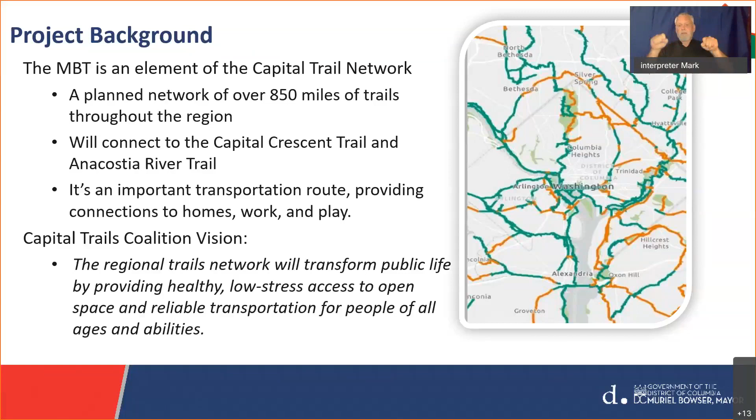For a little bit more specific background on the Metropolitan Branch Trail, if you're not familiar with it, the Met Branch Trail follows the old Metropolitan Branch of the B&O Railroad. And the idea for turning this into a trail goes back to the 1990s.

In the District and in sections of Maryland, it's been built in sections over the past 20 or so years. Here we see some of the milestones of development of the trail, when some of the first sections were built back in the late 90s and early 2000s.

This section that we're focusing on tonight is from Fort Totten to Takoma, and the rest of the presentation will focus more closely on that. We finished the environmental planning for this section in 2010, 2011.

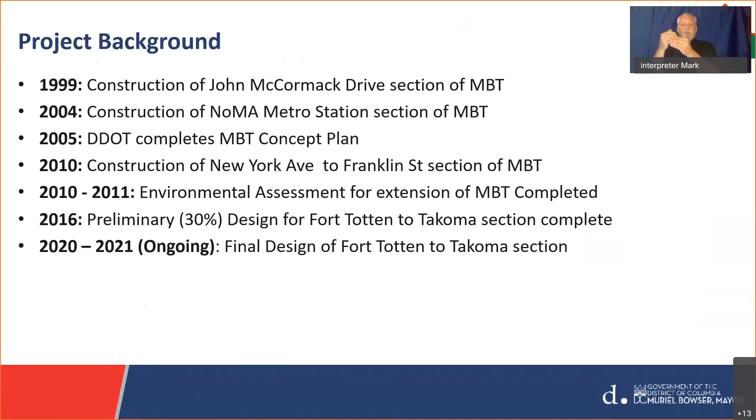We completed preliminary designs for this section in 2015 and 2016, and now we're approaching the final design and moving toward construction. You can move on to the next slide.

As Samer mentioned, this is only one section of the Metropolitan Branch Trail that we're going to focus on tonight, the Fort Totten to Takoma section. We did want to give an update on some of the other sections of the Metropolitan Branch Trail under development.

There are many of them, so we'll give brief updates, but if you have questions on these, you can follow up directly with me after the meeting, and we can connect you with some of our other staff.

For the other sections of the Metropolitan Branch Trail currently in development, there's a section on 8th Street Northeast between Franklin Street and Monroe, where we have a proposal to install protected bike lanes later this year that would connect the existing sections of trail running through Eckington and Edgewood up to Franklin Street, and then picking up the section in Brookland that runs along John McCormack Drive.

Moving north from there, there's a section of trail currently under construction in Brookland to Fort Totten that connects the John McCormack Drive section of the trail with the Fort Totten Metro Station. That project is currently under construction and is anticipated to be completed later this year. There's a specific project website for construction updates: metbranchtrail-forttotten.com.

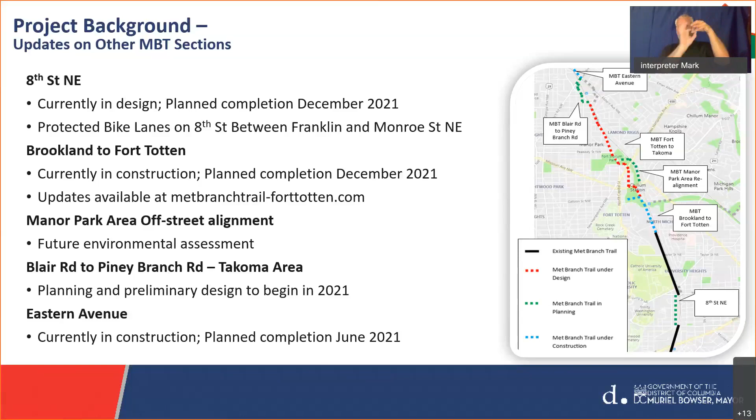And lastly, along Eastern Avenue between Piney Branch Road and the DC Maryland line in the city of Takoma Park, there's a short one-block section of trail that we're breaking ground on very soon, any day now. We're taking advantage of recently completed PEPCO work to move that project into construction, and we expect to complete it in June 2021.

So again, if you have any questions on the other sections of the trail, feel free to contact me. But for the rest of the presentation, we'll focus on the Fort Totten to Takoma section, and I'll turn it back over to Samer.

Thank you, Michael, for the detailed information. So now we're moving to the project overview, which is the section Michael mentioned, Fort Totten to Takoma, and that's what the presentation will be about.

The current project focuses on the mid-trail section from Fort Totten to the Takoma neighborhood. This section of the trail will be both on-street and off-street. Where shown in green, that's off-street; the red line shows the on-street segment, and the rest of the trail will be off-street along Blair Road.

The preliminary 30% design for this section was completed in 2016, and on this project we're taking it from 30% design all the way to 100% design. We are currently at 60% design, and the plans will be uploaded to the project group site after this presentation, as we mentioned earlier.

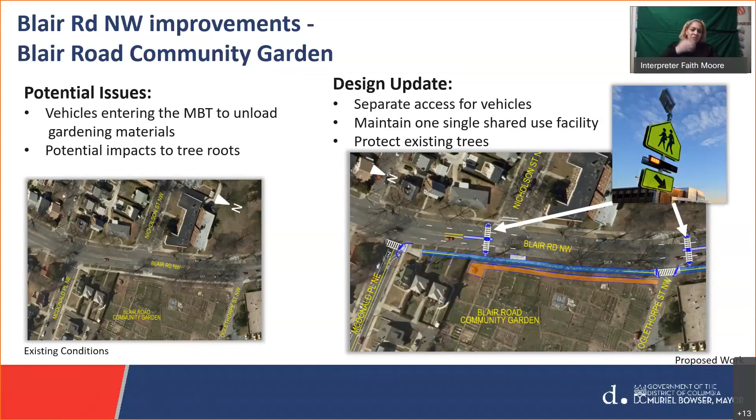Here's a before and after of what we expect things to look like. This is standing at Oglethorpe looking southward. You can see the proposed entrance to the garden on the left, and the new trail on the right. We're looking at protective measures for the mature willow oaks along Blair Road, and since there's a drop off here, we're considering railing along the path to protect trail users.

Okay, let's go to the intersection of Blair Road, Kansas Avenue, North Dakota, and Peabody. This is one of those intersections in the district that we all love, right? There's a lot of legs, everything kind of comes together. It's easily the most complicated intersection in the project.

In the existing condition, all legs have marked controlled crosswalks, so we already have good pedestrian accessibility to the trail. The MBT will be aligned on the east side of the road, which is something new to the design. We've been focusing hard on how to eliminate permissive left turns across the trail without jamming up traffic at this intersection.

What we're proposing is to signalize left turns from Blair Road to Kansas Avenue via Peabody Street. This is a change from existing conditions, because Peabody Street is currently one-way westbound, so drivers have to make their left turn from Blair Road onto Kansas currently. So what we're proposing is to make Peabody two-way and provide a continuous exclusive movement from Blair to Peabody to Kansas.

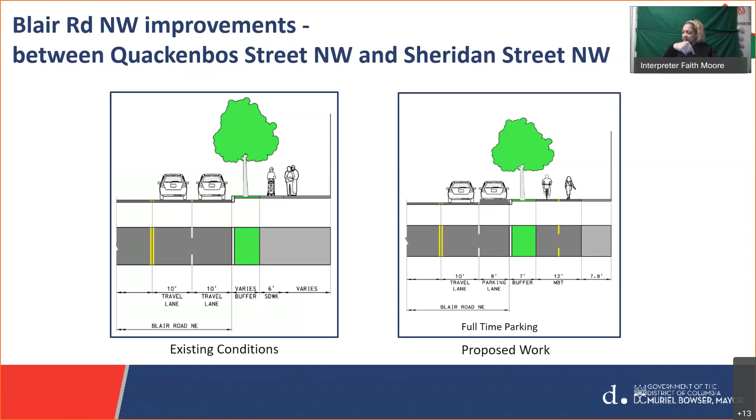Moving further north, at the intersection of Quackenbos, we're proposing high visibility crosswalks. No rapid flashing beacons are proposed north of Kansas Avenue, as the road will only be 2 lanes instead of 4, so traffic volumes are lower and the posted speed is 25. According to Federal Highway and DDOT guidelines, rapid flashing beacons are not warranted in these situations.

I also want to point out that in the existing condition, there is some frontage parking within DDOT right of way in front of the liquor store here, and that does come into conflict with the trail. So what we're proposing is to eliminate the frontage parking, but compensate for that by adding on-street parking along northbound Blair Road.

Continuing north to Blair Road at Rittenhouse Street, we're again proposing the high visibility crosswalk treatment. We're trying to get people to the trail safely, so implementing these types of measures we think will help. These are uncontrolled crosswalks, so we want to do as much as we can to enhance safety at these locations.

We also have existing curb extensions on the west side of the street, but we'll be proposing new curb extensions on the east side as well to help with traffic calming and to reduce that crossing distance as much as possible.

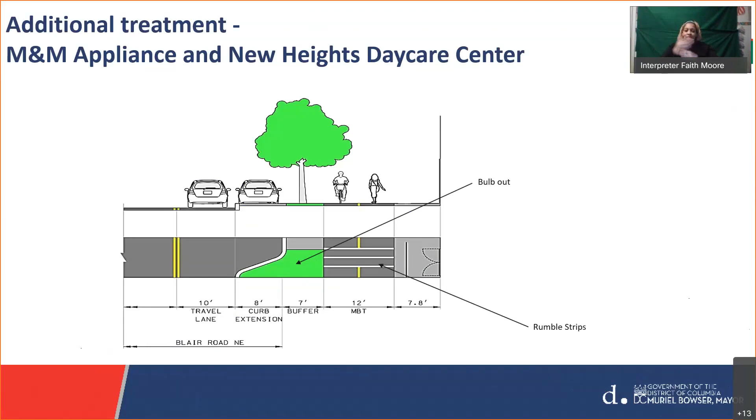Continuing north, the nature of the trail changes here. We open up, and we have one more property—a WMATA maintenance facility—with two driveways. The south driveway is currently in use and that will continue to be the case.

There's another driveway curb cut to the north, which is not in use, and WMATA and DDOT have agreed that this curb cut will be closed.

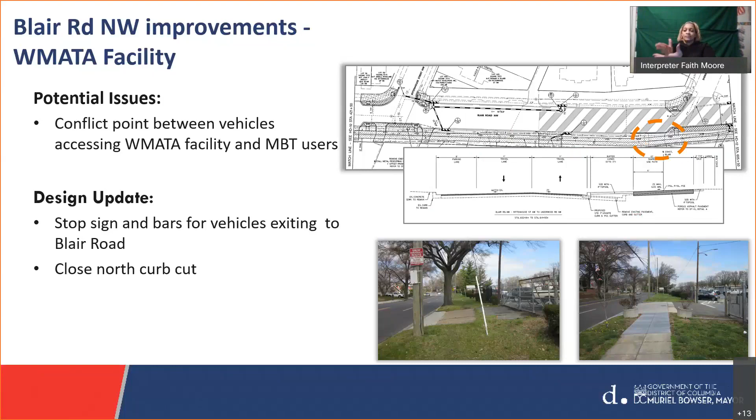Moving north to the segment between Underwood and Aspen Street, there are two northbound travel lanes. The outside travel lane will be converted to the shared use path.

The existing retaining wall is owned by WMATA, and the footing extends below Blair Road, so WMATA does have an easement in the area. We are coordinating with them on those items, but we don't propose to impact that wall or the footing below. We'll be just constructing the trail above that.

The barrier will terminate intermittently as it approaches intersections where there are crosswalks - at Van Buren, at Aspen, and then also there will be a crossing at Whittier.

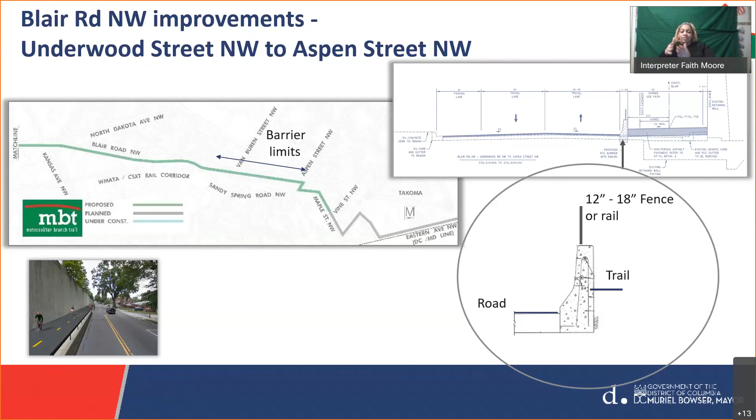Currently 3rd Street is a two-way street, and we will be proposing to make it a one-way southbound street. Vehicles intending to head northbound on Blair will take a right onto Whittier and then take a left onto Blair. We are also proposing back-in angled parking, which results in a net increase in this area of 3 parking spaces.

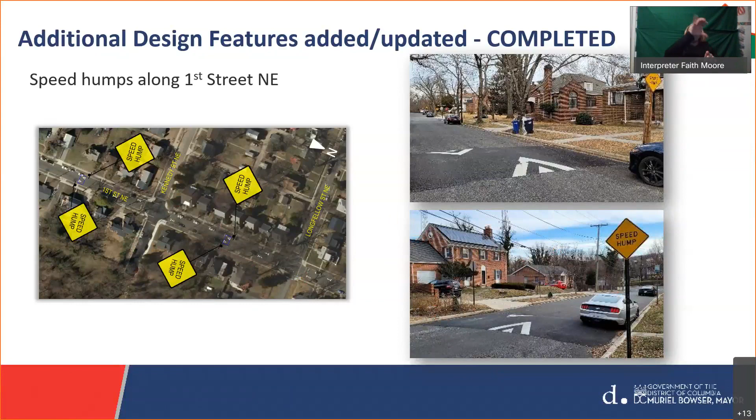Thank you, Steve, for the detailed explanation of the Met Branch Trail design. That's very helpful. Thank you very much. So now let's go back to the schedule for the project, since we have all the fun stuff we're going to do along Met Branch Trail.

I'll go over the schedule. We started final design in January 2020, submitted the 30% design in May 2020, and now we're submitting the 65% design, which will be uploaded to the Met Branch Trail website. Our goal is to finish the 100% design in spring 2021. Based on that, we're looking to start construction in winter 2022 and finish in fall 2023, giving about 2 years of construction to complete the project.

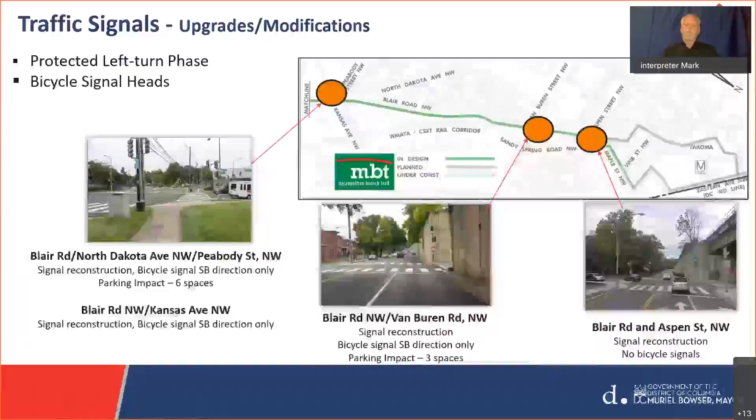What we were really focusing on tonight was the signal at First and Riggs, and the new signal at New Hampshire. There's a small segment of the project at Riggs and along First Place Northeast that we didn't cover in detail — those areas were designed at 30% and haven't changed much. We wanted to focus tonight on areas of the project that have been updated. These are still part of the project and will connect with the project currently under construction to the north and south.

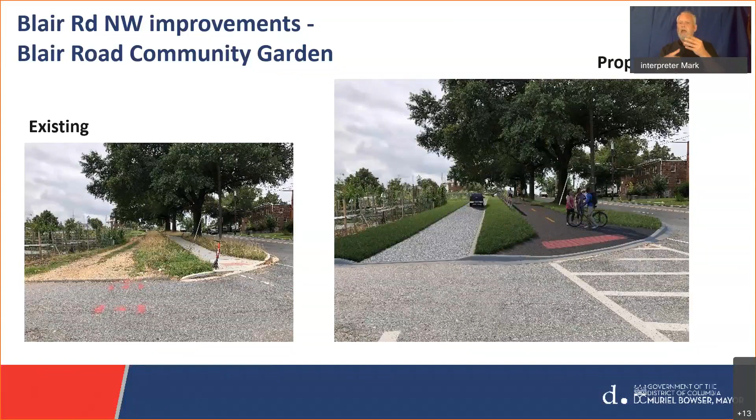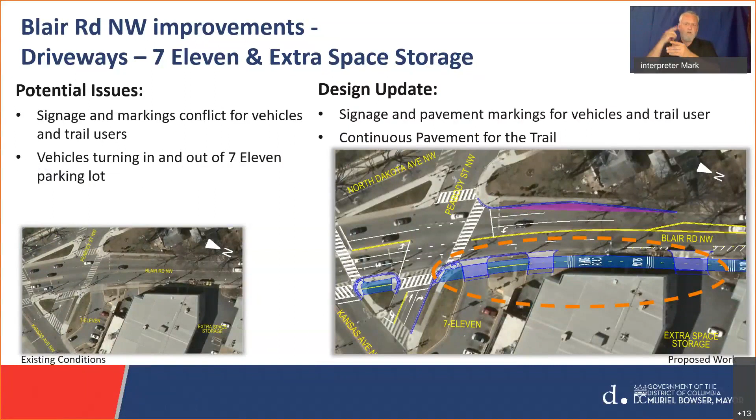For the next question: can we reduce the number of curb cuts at 7-Eleven and the extra space storage? We evaluate the locations, but those curb cuts have been used, so DDOT cannot close any curb cut already in use. So it's not that we're not in favor of closing them, but we can't because it's been used by all these businesses, and if we close them it will impact those businesses. We're building the trail here to serve the community and the businesses, and we cannot close any curb cut that serves or will impact any business along the trail.

Next question: what thought has been given to routing the trail across NPS land between First Street Northeast and the track? I apologize if we already covered this, it took me longer to join the meeting than anticipated. I think, Michael, you answered that question earlier. Yes, bringing it back to the section of trail between First Street Northeast and the railroad tracks on NPS property that we talked about earlier.

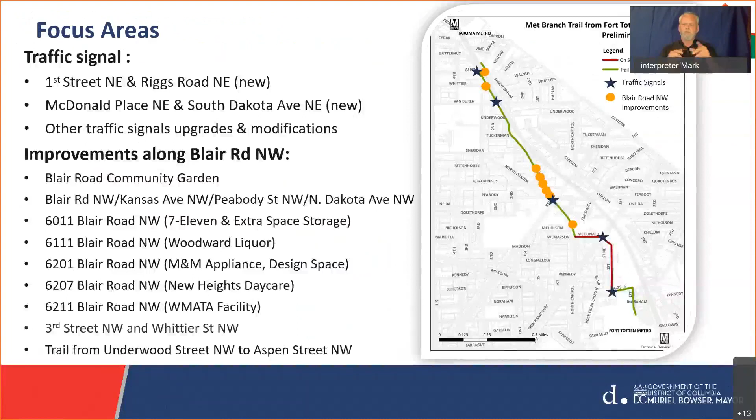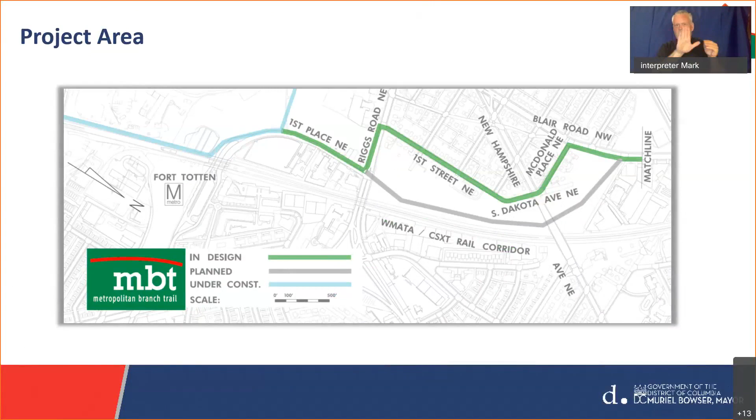Okay, could we propose to add a CaBi station and/or bike parking at Third - sorry, I just scrolled down - at Third Street, instead of adding three parking spaces? We could take that into consideration, but we'll think about that when we go back, and take it as a comment rather than respond to this question right now. It's something we could consider. Thank you for your question.

When you get to Aspen, is the trail elevated off the street or is it at street level? Do you have a rendering or the space usage for the Aspen underpass?

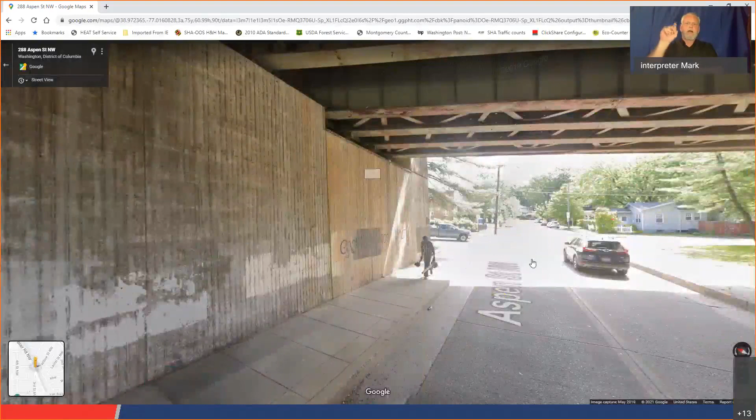This picture shows the trail will be under the bridge, so the trail extends under the bridge, and we'll provide more visual pictures. If you need more detail, please email us your concern and we could provide more detail for this section, showing how the trail will run along Aspen. Maybe Steve, you can talk about this a little bit. You can get a visual here from the Google Street View.

It'll be above the curb, but at that sort of sidewalk level. The 65% plans propose the trail to be at the sidewalk level here, and then this dirt space is proposed to actually be brick pavers.

DDOT team and all consulting, thanks, great job. Can we shorten the time between 100% design and start of construction? Let's move faster. Thank you.

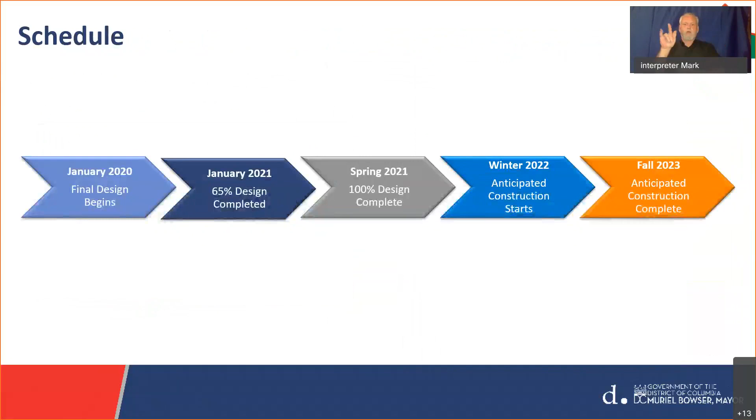Actually, we would love to, but we have to coordinate with our stakeholders, such as the utilities and water, so the next phase of this design is more focused on this coordination, making sure we meet all agreement design and resolve any conflicts with underground or on-ground utilities. That's the next step in design. That's why we can't move to 100% unless we clear all these utilities and satisfy all the design requirements based on federal highway requirements and DDOT laws. We have to make sure we meet the requirement and law.

Next question. I would just add that we were coordinating with WMATA and CSX on that retaining wall mentioned during the presentation, and also with utility companies, DC Water and Pepco. We don't have a lot of utility pole impacts, but we do have a number of guy wires that create vertical clearance issues and horizontal conflicts between the trail and the pole. We are coordinating with Pepco on relocation of those guy wires outside of the trail envelope. These things take a little time, and we have to make sure we're clear with storm drain improvements and clear of underground utilities like telecom, underground electrical conduit, gas, water, and sanitary sewer.

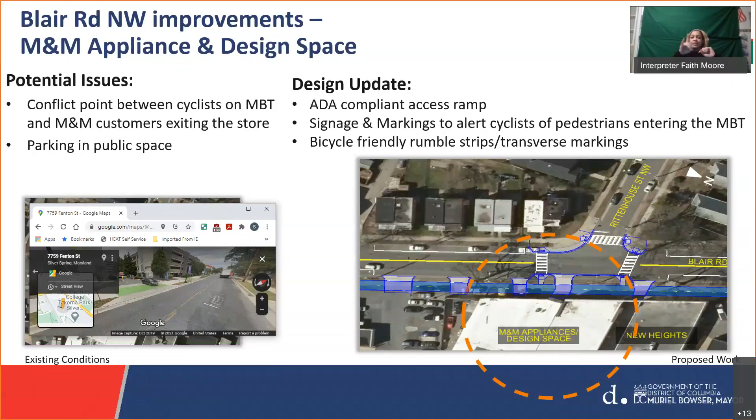I wanted to go back to the Blair Aspen intersection and ask if you are anticipating planning any signal changes there, because one of the things that makes the Aspen Blair intersection so dangerous is westbound Aspen cars trying to turn south onto Blair Road. It backs up because when there's a lot of two-way traffic, cars will back up for blocks, and then they're parked in the intersection. One of the things my constituents always talk about is whether there's enough room underneath the underpass for a turn lane, or just a left turn signal for those cars trying to get onto Blair South.

I also know the Aspen Blair intersection was one of the priority intersections in the livability study, so I wonder if that's being included here as well. I think for the livability study it was focused more on connecting bicycles and pedestrians from that intersection to Butternut. But I'll stop there—I'm really curious if you've thought about that kind of movement.

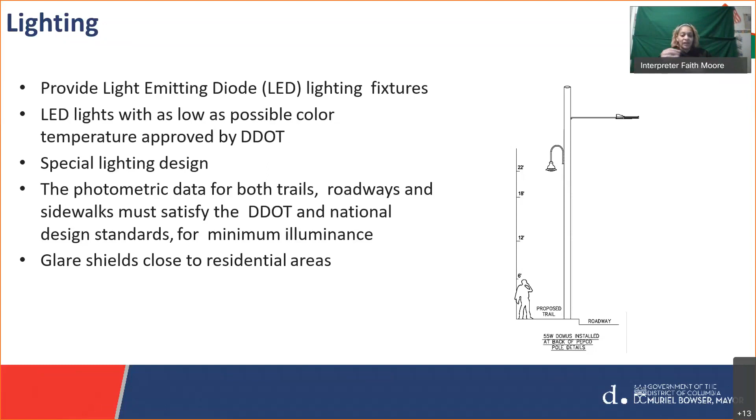Thank you. For the first question, on the interim signal and the final signal, the reason we had two phases is because based on a request from the school at the intersection of Riggs and First Street, they want the signal expedited for student safety, for crossing, and for the queuing along Riggs Road. So we expedited the signal design and construction for the students at this school. The signal will be temporary until the trail construction moves forward, and then we have to come back and redo the signal to add bike signals and upgrade it to meet the trail design.

Your second question was about Peabody and Kansas. That intersection, like you said, is very big, and I agree with you the picture may not clearly show the design. Steve, can you move to that slide showing the intersection for Peabody and Kansas?

Like Steve explained earlier, we're adding a left-hand turn movement just to relieve the queue along Blair Road. We shift the queue from Blair all the way down to the middle, so we have to make that left-hand turn to Kansas. I think Steve is going to talk more in detail about this, if you could just help me out with that.

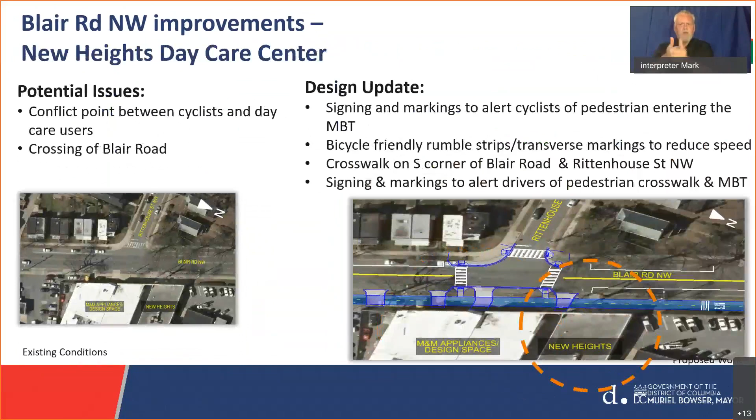Here's the question. I saw on the drawings that the plan is to take the MBT underneath, now, Aspen over to Sandy Spring. And this is new to me. I've been following this for a long time, I've never seen this as part of the plans, because unless this is not going to be where the trail eventually connects up with Takoma Park. My question is, what is the plan for when the trail goes underneath the tracks and connects up with Sandy Spring? Where is it going to go from there?

So the trail will be going—the trail will be using the community as well. It will be like a connection between Fort Totten and Takoma Metro Station. So the trail will continue up to Takoma Metro Station, so it's more like A to B points as well. It will be like a trail for the community and a commute between the two metro stations, which is Fort Totten to Takoma.

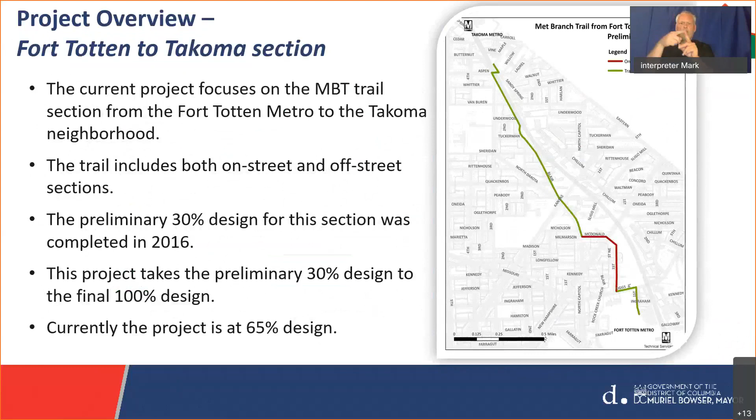Yeah, and I can respond to that as well. If you look at this map—it's a little small—if you were to zoom in on the Takoma area, going back to the concept plan for the Met Branch Trail in the early 2000s, there was a lot of debate about how the trail would get through the Takoma area, downtown Takoma Metro Station. There were two alignments, a western alignment and an eastern alignment. The Sandy Spring route, when the trail goes north to Aspen Street and then goes under the railroad tracks and up Sandy Spring, that was feeding into the eastern alignment. So the eastern alignment was from Sandy Spring to Maple, you see that gray line, to Carroll Street, and then to Eastern Avenue, where it connects into Maryland.

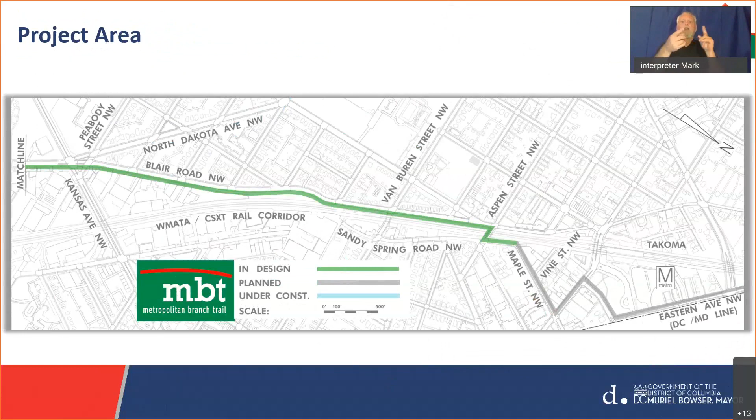And then there's a western alignment that goes up, cuts over from Blair to 4th Street, and then up through the 4th Cedar Blair intersection, and then actually behind the Cedar Crossing building and up to Spring Place, to Chestnut Street, and then down a big hill, where it ties into Piney Branch. So those two alignments are the eastern and western alignment.

So the Sandy Spring option, we've terminated it for now at the intersection of Sandy Spring and Maple. We think it still provides access for people who live on that side of the tracks to get onto the trail. And as we mentioned before, we're going to start the design on the western alignment to make that connection all the way between Blair and Aspen and Piney Branch and Eastern, where it'll link up with the rest of the existing trail.

This is Tony. Thank you for the explanation, Michael. I better understand that now. But I also think you've illustrated my point a little bit about the complexity. If you're going to run the trail eventually up 4th Street, it's a lot closer to North Dakota Avenue, and I think it would make for a much more pleasant riding environment for folks to come down 3rd, connect to North Dakota, and then come over to that busy intersection—God help you with that intersection. But thank you for the response.

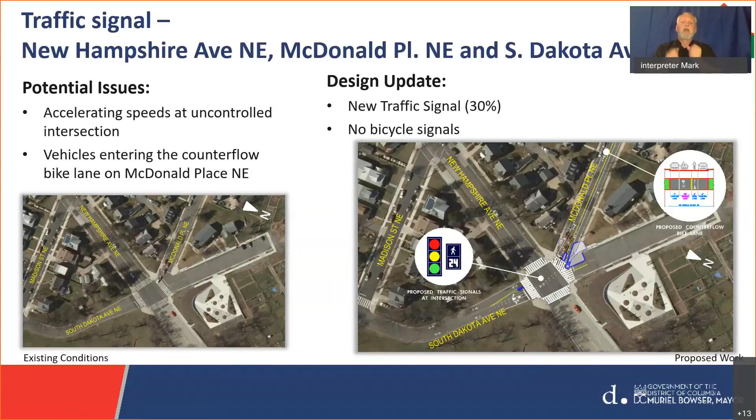Sure, we understand there are a lot of things happening in that area, and so we are coordinating with the different parties, such as PEPCO, that are doing work in that area, to make sure we are cautious regarding construction and how much construction the neighborhood sees. I shared with you, Commissioner Brooks, that unfortunately we do have to do this construction in order to provide this trail for the many users that are going to use it, and to provide a safer street for all residents and users of the road.

We do thank you for your comments regarding the streets you classified as narrow, as well as the parking restrictions. We take those comments into account, and we'll make sure to look into those concerns if we haven't done so yet, and follow up with you via phone or email.

Yeah, that's fine. Before you were at DDOT, Ms. Molina, we had this conversation in several community meetings, and basically we were told we should just be happy that you're not going to take away any of our parking spaces. There was the inference that if we didn't get along and accept what was coming down the pike, we would be punished through the loss of parking spaces. I want to make sure we're all clear that this is not widely supported at this end of the trail. A bike path is supported, and we are in favor of that, but not this location, and that's for a variety of reasons.

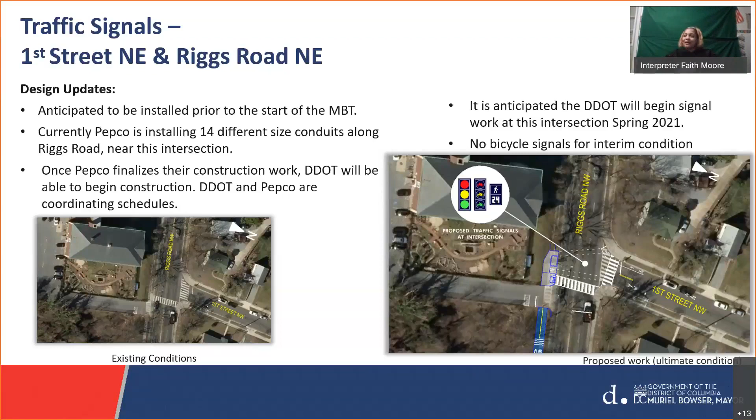But closing curb cuts, I cannot promise you at all, because we've been discussing with the right-of-way team, as well as the permitting office and access management, about closing this curb cut. Actually, it's going to be impossible to close them. So I cannot promise you we'll be able to close these curb cuts, because those businesses will say it impacts their business, so we cannot close them. We'll get pushback from businesses along Blair Road.

But modifying those curb cuts will be possible, and we already did it at the liquor store. We'll modify the size of that curb cut with the new design. And for your second question, I think Michael has a better understanding about the branding for the trail. I'll let Michael take it.

Sure. Yeah, so the Met Branch Trail has its own branding design, which is this green, red, and white package.

This includes wayfinding signage along the existing section of trail, and that will be extended to this section. This section of trail includes a couple of turns and twists, so these signs are included throughout, directing people so they know how to follow the trail, but also how to get to the trail and connect to the metro stations.

And it has a consistent pattern connecting the rest of the city, from Takoma to Fort Totten, to Brookland, down to Edgewood, Eckington, and down by Union Station. You'll see this familiar Met Branch Trail wayfinding.

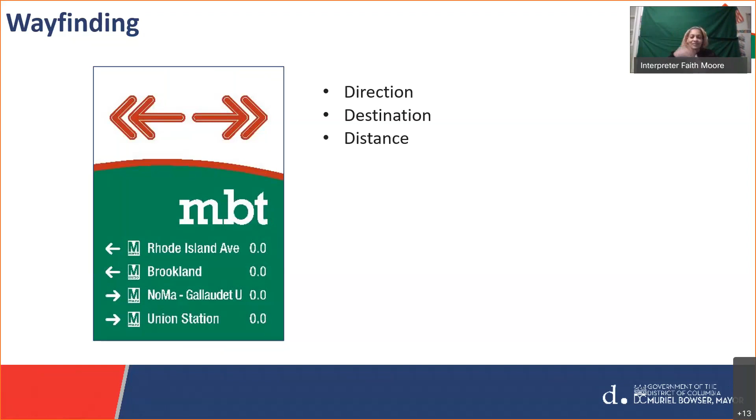Thank you, and thank you so much for the work on this. It's incredibly exciting to see it advancing. I wanted to ask about connectivity at the northern end of this stretch. A longstanding problem for safe bike travel in the area is the lack of a safe east-west route between Takoma and points west. Currently, the only designated bike route is Butternut Street, and there's a bike lane there, but it only goes about halfway between Blair and Georgia.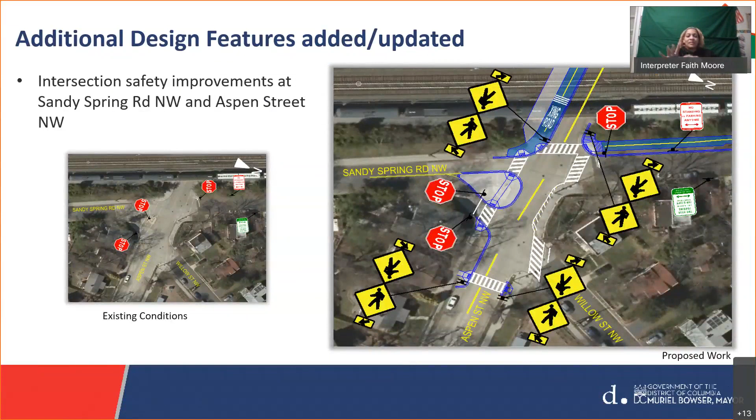I think it can't be extended due to road width. And Butternut is a major commuter and commercial route, so it's just not a safe or comfortable place to bike. This becomes more important with the MBT going in there, and with the Walter Reed development, which has a school and is supposed to have a swimming pool and other amenities. Walter Reed's going to have this great new bike path on Aspen with the famous sheds, but there's no safe way right now to get from Walter Reed and that trail on Aspen to Takoma and the MBT.

There's been some discussion of maybe making one of the east-west routes one-way and adding a contraflow bike lane. Van Buren is already one-way past the rec center, so that would be an option, or maybe Whittier or Dahlia. I just wanted to get your thoughts on this, see if this could be considered. I know you're moving toward thinking about the western alignment for going past Takoma, and as you do that, thinking about how this could connect to points west could be part of the conversation.

I can respond to that. Thanks, Michael, for the second part of the comment and question about the east-west connection to Walter Reed. I think the question is right.

There's no clear connection between what's proposed at Walter Reed, where there are actually two paths, one on Aspen Street, Georgia Avenue, and 16th Street. But there's also another trail within the campus between Georgia Avenue, not quite all the way connecting to 16th Street. That one, on what I believe is called Main Drive, lines up with the entrance at Butternut Street, and we do have bike lanes on Butternut Street.

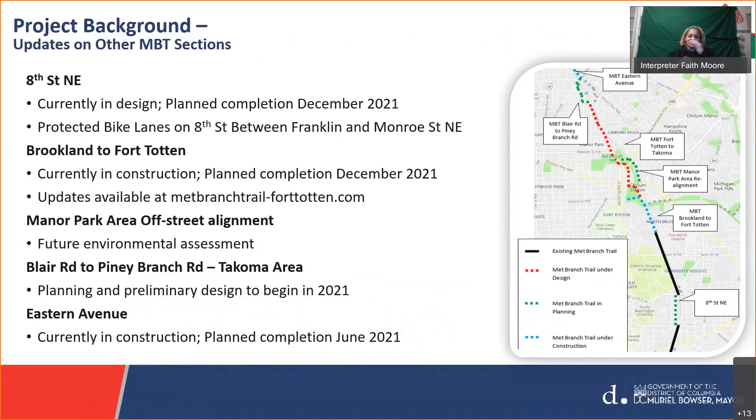Can text be added to the slide to detail exactly what is being proposed for North Dakota, Peabody, Kansas? It's hard to tell what is supposed to be going there. So we can provide a better picture or image showing the operation for that section, to go into more detail. Steve, would you mind getting better illustrations we could show? We could upload to the website once we have something accessible, upload it to the Met Branch website.

And I guess, in what way are we interested in the operation—showing the different phases and who's moving during which phase? Is that kind of what we're getting at? What do you mean, Simon? Exactly, Steve—well, I guess I'm trying to... I mean, we can show a plan view versus an existing view, like what we're showing on the screen. But I don't know if it would help to show the existing travel, like turning movements. On the left side of the screen here, we just show the road, but we don't really show what the lane configuration is, as far as what movements are through and what movements are left or right.

Or we can provide something more like a phasing diagram that shows, for each phase of the signal, which vehicle has the right of way, who has the green—you know what I mean? Oh, I see what you mean. So we're just looking for clarification on what the desired deliverable is.

What is the comment asking for? The comment isn't very detailed—it just says add a slide to detail exactly what is being proposed for North Dakota. Can we have the phasing diagram and the layout in the same slide, or maybe just upload the traffic report to the website so people can read the report and see the illustrations? I think that will be more beneficial.

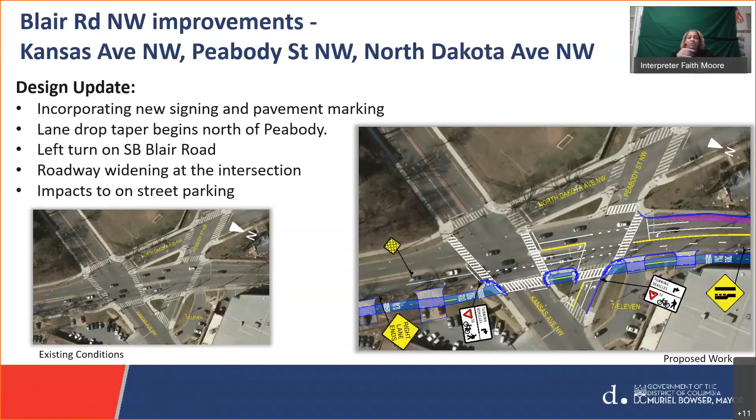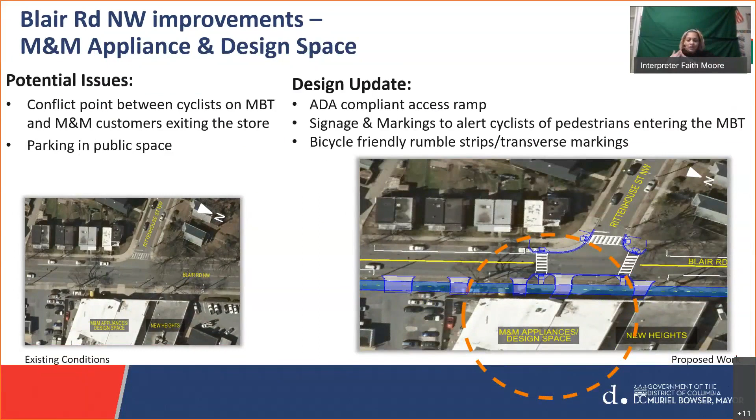I put a bunch of questions in the chat and I think they mostly got answered, but I wondered if you could talk about the experience for users of all modes at Van Buren and Blair, specifically accessing the trail. If you're on the trail, what is it like to cross Van Buren? And also if you're coming from Van Buren westbound, accessing the trail, and drivers crossing the trail, could you dive into that for a minute? I really appreciate this—I have an elementary school son and we're both excited about better access to downtown and Silver Spring close to our home. Thank you for all the work you've done putting our feedback into the plan.

Sorry, we kind of breezed by Van Buren. Basically it will be a full signal at that intersection as it is today, and that's one of the intersections where we're looking at southbound left-turn protection for users traveling north-south trying to get to the trail from Van Buren. On the west side of Van Buren there'll be a head signal, push-button activated, with a pedestrian ramp and lighting at the intersection, similar to what it is today. The crossing distance will be narrower since the trail will take up the right travel lane, the outside northbound travel lane.

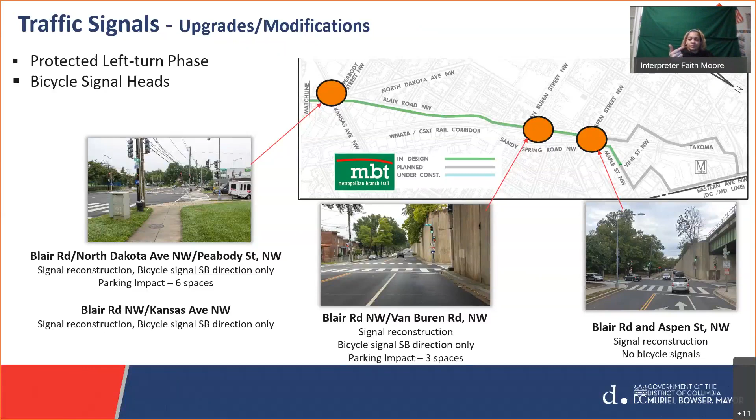What else—I guess I can bring up the rendering so you can visualize the barrier here. This is at Whittier, but imagine the barrier terminating in advance of the intersection. I don't have an exact distance, but probably 25 to 50 feet from the intersection, so we have good sight lines there. The barrier won't be that tall—still lower than the AASHTO object height guidance—so if you have a child, shorter than an adult, they should still be visible as they stand at the intersection, at the ramp. I think that's essentially it.

Did that answer your question? Yes it did, it reminded me of another related question. We have a lot of heavy truck traffic making that turn off of northbound Blair onto eastbound Van Buren to get into the hauling facility right on the other side of the tracks. I'm curious whether that corner, that turn, is designed so those trucks don't crush any of the infrastructure, but also so they have enough advance notice to not crush any cyclists.

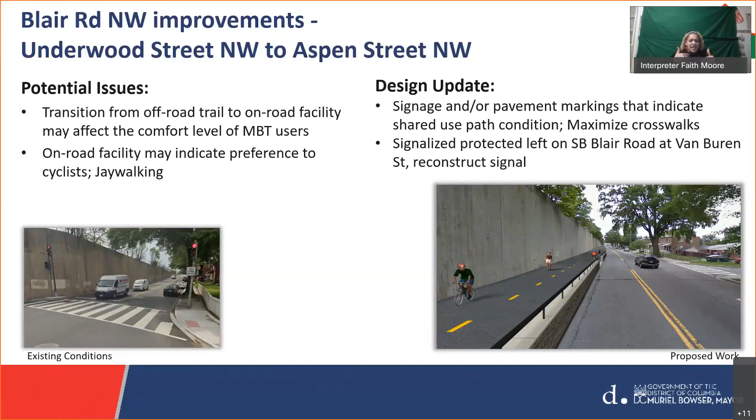Oh, and just as a follow-up on your first question, we are proposing crosswalks on all legs of Van Buren, so all 4 legs. Oh, yay, that's a good upgrade. That's right, Andrew, right, all 4 legs? Yes, but I think that's the existing condition already, that there's crosswalks at all 4 legs of the intersection. They could use zebra, high visibility, which are kind of like the piano stripes. Thank you.

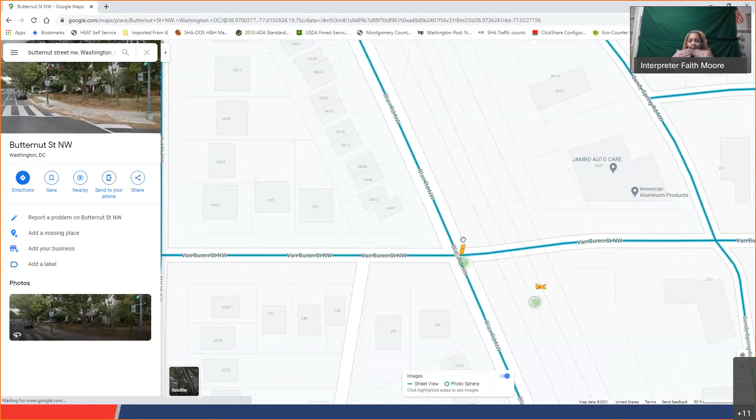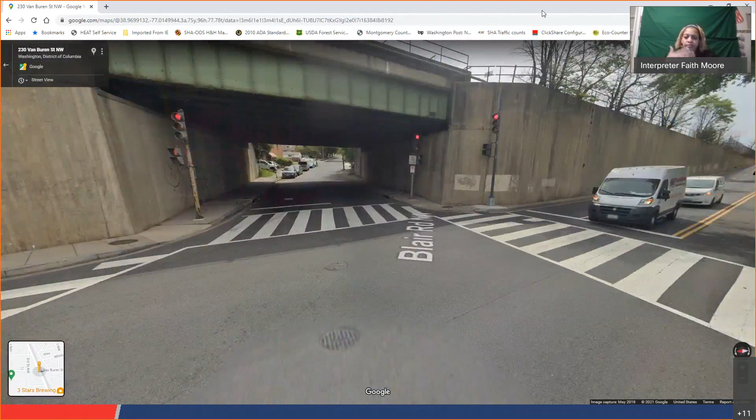So the next question we have would be, will upgrading the light under the Van Buren underpass be included in the project? Alan, can you answer? Just want to double check with Alan. I'm sorry, the question was about lighting. Will upgraded lighting under the Van Buren underpass be included in the project? I'm not sure, do you have any clues, Steve, for this question?

I don't think we're currently looking at lighting under Van Buren. Alan, are you still with us? I think we're probably looking at lighting under Aspen, but that's what I recall, I'm not sure. Let's follow up with this question, we can discuss this offline and get back to you about it.

It's 8:30 now. Yes, I think we'd like to wrap up. There's a couple questions remaining in the chat, I'm not sure how we want to follow up with those folks. Maybe we can get in one or two more and then follow up with the rest.

Which question do we have here? Will the speed limit be lowered on Blair Road to bring it more in line with the new design? Actually, I think the speed limit is already like 25 miles per hour. Is it now? Posted 25 north of Kansas. Does it go to... I think it goes to 30 south of Kansas.